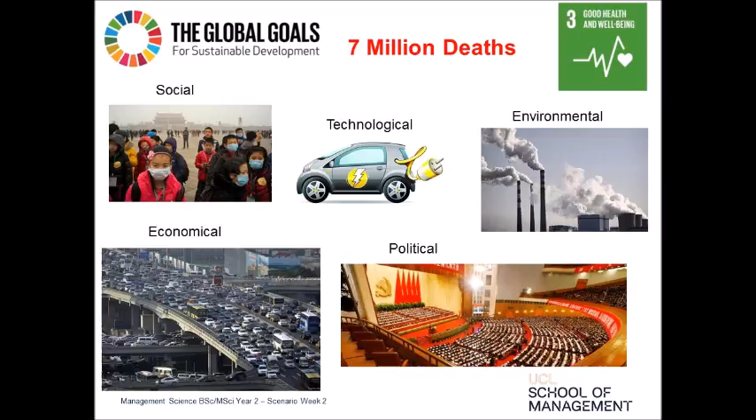Given Blueair, a Swedish air purifier filter company, as a starting point for this task, we have identified the main weaknesses of the well-known HEPA high-quality filter.

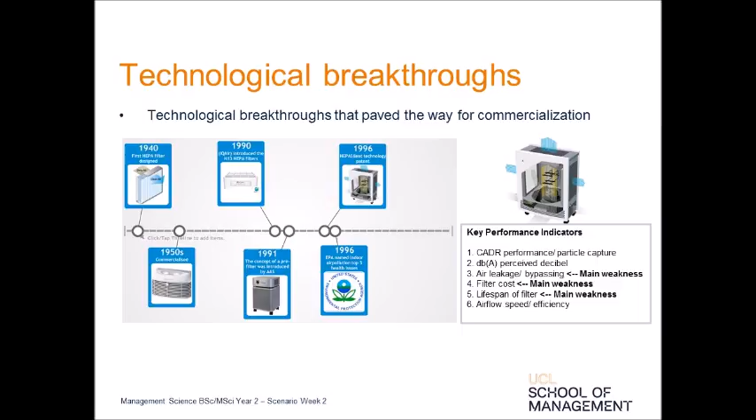Secondly, another main weakness is that HEPA filter can only remove 99.97% of particles in the air down to 0.3 microns in size. But knowing that 90% of particles are smaller than this, called ultrafine particles, these filters themselves do not actually solve the problem, as it is marketed by profit-driven companies.

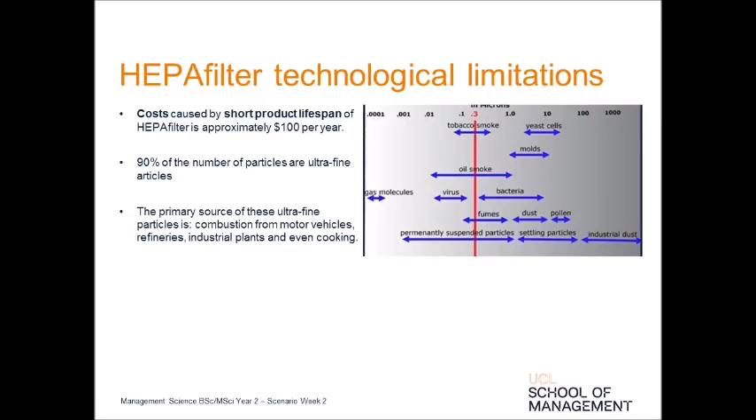In terms of potential new application for the technological improvements, it obviously boils down to the economic viability of such an application. We first sought to implement HEPA filters in cars' already existing air conditioning systems, but we then asked ourselves, who will want to pay for this?

We realized quite quickly that the barrier, the high cost of adding this filter to a car in the manufacturing process, was way too high. So after doing a quick cost-benefit analysis, we decided to narrow down to public transportation only, and more explicitly subway trains located in Beijing, China, assuming that governments are more willing to take on this cost. Why is this true?

Firstly, generally speaking, governments should have more capital to play around with in the transportation budget to create value for the common good compared to profit-driven car manufacturers.

Secondly, also from the incentive of healthcare cost savings in the long term caused by indoor air pollution, governments become a more realistic source of capital for implementing HEPA filters in subway existing ventilation systems. By this, we know that we have targeted the right application for this technology.

As we choose to focus on the air quality of public transportation in China, we further decided to choose the rail transit systems in Beijing as a starting point for our scenario. The reason we chose the subway system is mainly because of the proved bad air quality inside the subway.

A non-government organization did research about air quality inside the Beijing subway system and reported that PM 2.5 value reached 72 in the carriage and 129 on the subway platform, while the outside index is only 8. This means air quality could be up to 16 times worse in the subway system than outside.

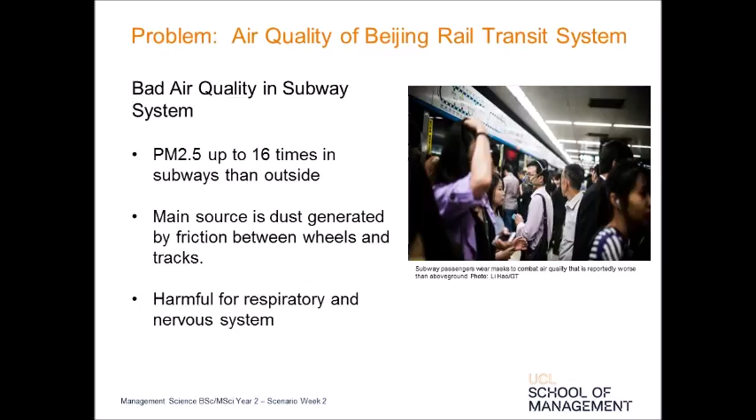Moreover, choosing Beijing as a starting point is because of its scale and influence. Firstly, we ran a quick search showing that China and Beijing ranked top 1 and 2 in terms of social sharing about the air pollution problem.

Secondly, Beijing subway has the highest ridership in the world, with 3.41 billion trips delivered in 2014. And it is estimated that the size, in terms of length, of the whole system is going to be doubled by 2020 compared with 2014.

Also, in terms of commuting time, BBC found the average time that a commuter would spend in transportation in Beijing reached 52 minutes, which is the longest in China, and even worse than in New York. That means a massive number of riders in Beijing are spending a considerably large amount of time in the subway.

Furthermore, several cases have been reported of frequent subway riders in Beijing having lung and brain problems, potentially because of the bad air quality inside the Beijing subway system. Therefore, improving the air quality in the Beijing subway can potentially reduce the exposure and illness for a large number of riders.

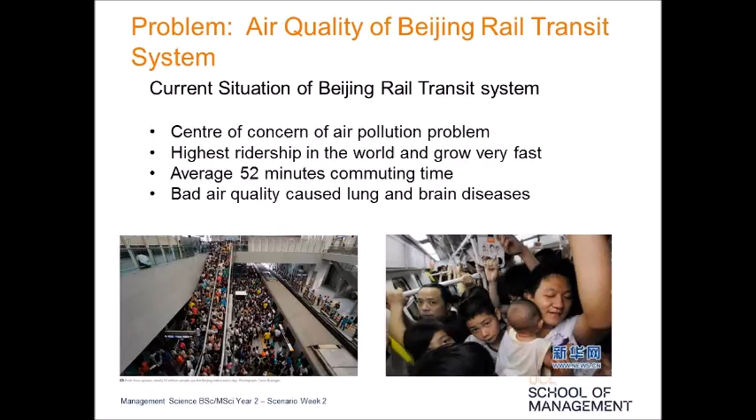We want to deal with this problem more efficiently by applying new technology that has been developed, installing high-quality air purifier filters inside all 3,400 subway carriages in Beijing.

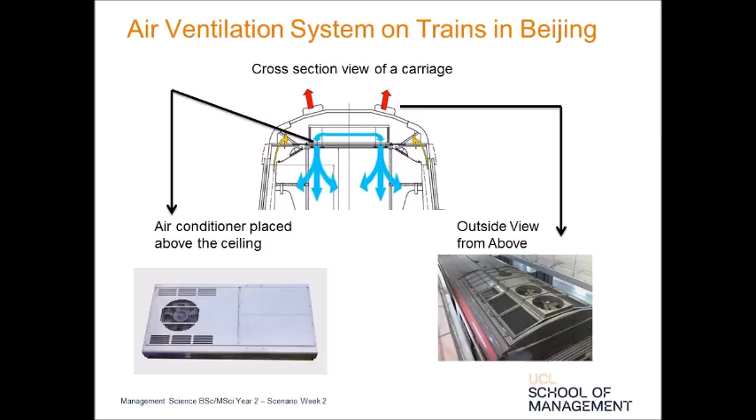We now look closely at how we can reduce air pollution inside the trains. In this cross-section view of the carriage, the yellow arrow shows dirty air being pushed into the roof compartment, the red arrow shows some air released outside, and the blue arrow shows conditioned air which went through the air conditioners placed just above the ceiling.

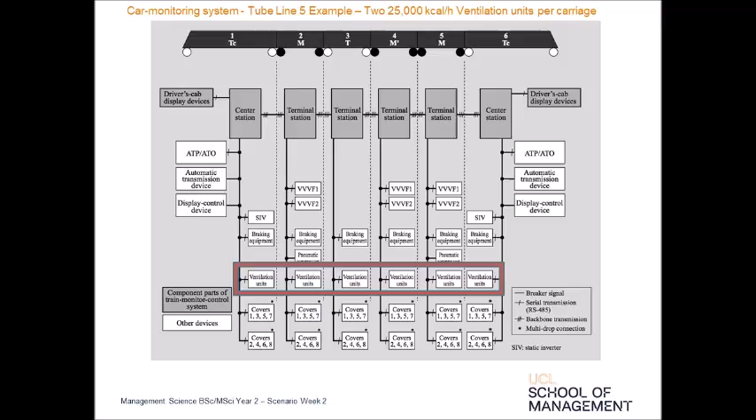This figure shows the configuration of the car monitoring system for a typical train such as Tube Line 5, which runs through Beijing. The system shows a range of electronic devices on the train in each carriage, and shows if the ventilation units are working or not. There are 2 ventilation units per carriage.

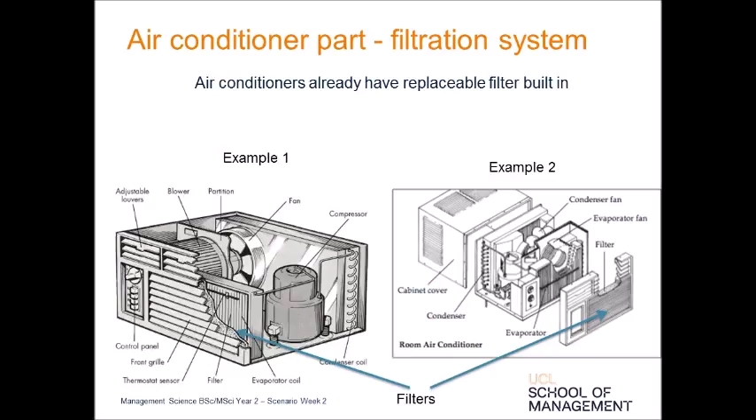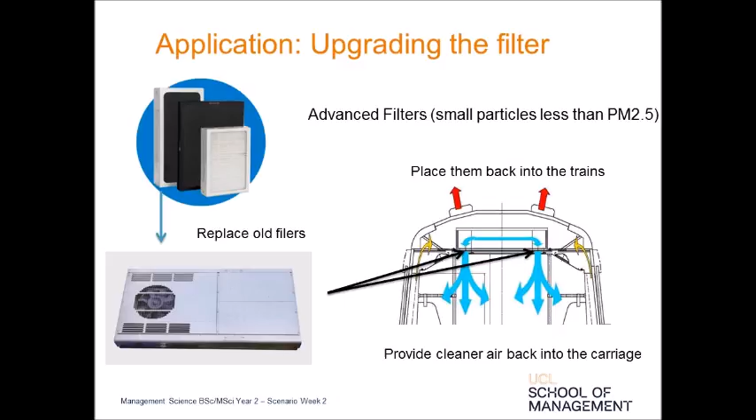We can do more with air filtration technology by replacing the existing low-quality air filters with advanced air purification filters specifically designed to purify air and reduce the level of small particles, size PM2.5 or smaller. As Anna said earlier, HEPA filters are actually not as brilliant as they sound at first glance, and they are not successful at removing ultrafine particles.

The next stage up is the ULPA filters, which are able to remove 99.999% of particles down to 0.1 microns in size. But it is this last segment of particles, 0.1 microns and smaller, that actually makes up 90% of all particles in the air, which we want to be more successful at removing.

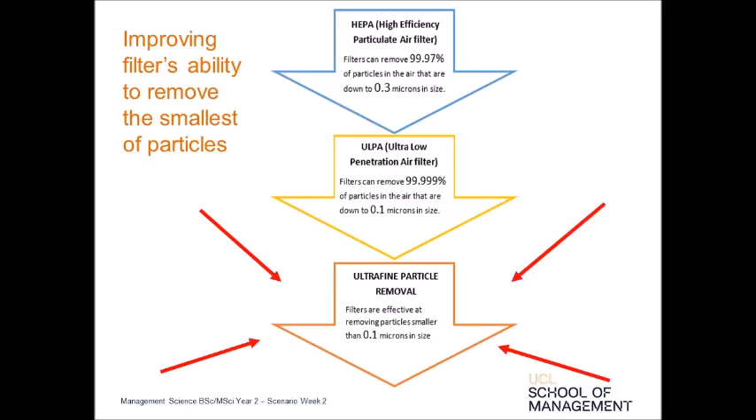Having done some analysis, we came down to 3 technologies that work to remove ultrafine particles below this boundary of 0.1 microns in size: UV, ionic, and activated carbon. We chose to look at activated carbon in particular, as UV produces ozone which is harmful to human health, and ionic filtering systems are not as efficient at retaining the particles they filter.

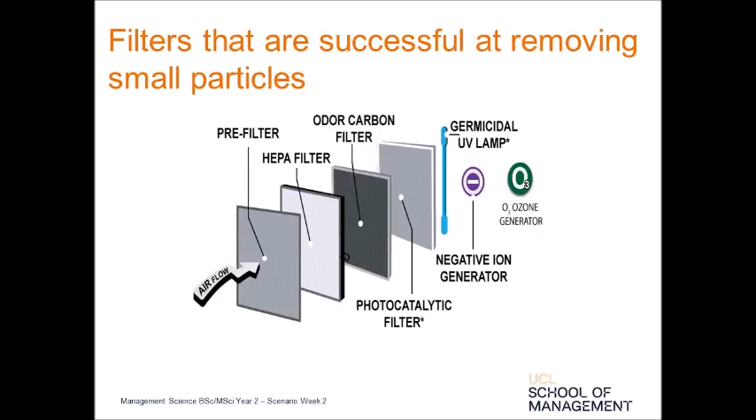To give you an idea of how activated carbon works as an air filtering technique, carbon is treated with oxygen, which produces a highly porous material providing a large surface area. It is this which gives activated carbon its unique absorption properties.

The process creates a very large internal surface area. The more surface area, the more the carbon can absorb. The activated carbon pores can be as small as 0.02 microns in diameter, and this allows it to remove the tiniest of particles, including volatile organic compounds.

Sometimes the carbon is treated with oxygen and another chemical, often potassium. This creates a chemisorbent, which is better at removing inorganic gases and gases that are highly chemically reactive.

Activated carbon works by adsorption. In this process, the gas bonds to the surface of the activated carbon, letting the clean air flow out of the other side of the filter. Due to the large internal surface area of activated carbon, it can actually absorb up to 60% of its weight.

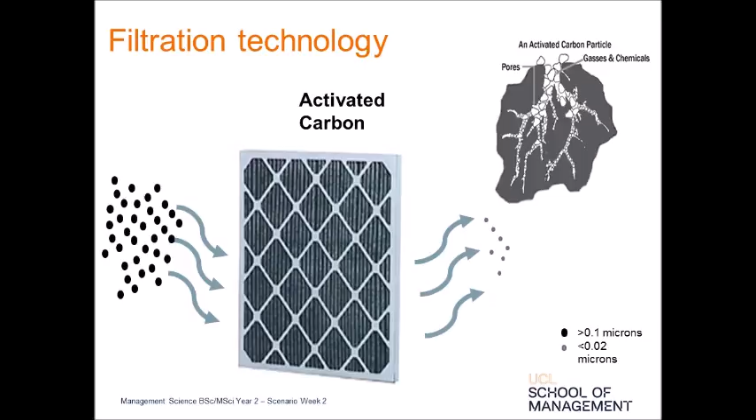Good carbon filters of 10 pounds or more, depending on the environment in which they are used, can last anywhere from up to 5 years before all the pores are full, and then it would just be a case of removing the activated carbon layer and slotting in a new one.

We recommend using 2 layers of activated carbon at different stages in the air purifying unit. For example, here we have 1 layer between the pre-filter and the HEPA filter, and 1 at the end. This is a sort of double check, if you like, that as many ultrafine particles as possible have been adsorbed and won't be released back into the air.

So what's so great about activated carbon as an air purifying material? Well, it can absorb 60% of its weight in airborne pollutants. The more activated carbon in the filter, the more pollutants it can remove and the longer the filter lasts. It's cheap and also light.

A study done by ResearchGate found that there are on average 2.49 times 10 to the 10 ultrafine particles per cubic metre of air in Beijing. We combine this with the volume of Beijing subway carriages, which is 101.4 metres cubed, and with some simple calculations...

...we were able to conclude that in the best case scenario, if the activated carbon only absorbed the ultrafine particles in the air - not a far off assumption, as it is less effective at collecting the larger particles, where the HEPA filter stage works best - then just 1 pound of activated carbon in a filter could adsorb close to 6 million times the volume of ultrafine particles in one Beijing subway carriage.

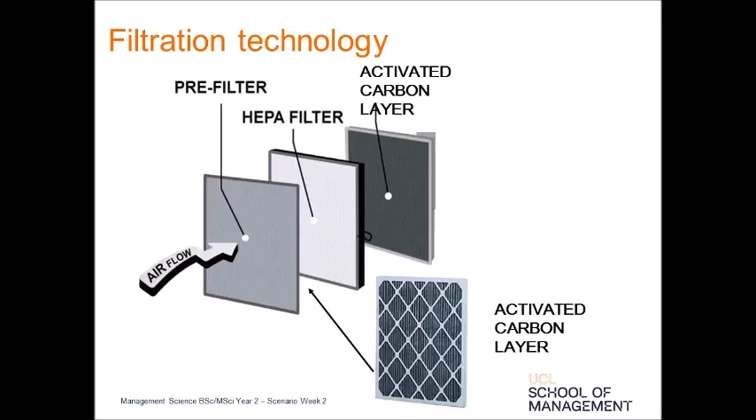Considering also that the average number of riders daily in Beijing as of 2014 was 9.28 million, these filters have the ability to have a positive and significant impact on the health of these commuters every day.

After doing a detailed patent analysis on QUID, we found a recent patent filing from China which presents a specific activated carbon filter material useful for air conditioner filters and air purification devices. So we believe the technology is just emerging, but already it's been considered for use directly related to our application of air conditioners.

Knowing how high the cost of replacement is, in order to successfully realize the integration of filters in the Beijing subways, we need to maximize the cost effectiveness when replacing the filters in the air conditioning systems. From previous analysis, we know that the lifespan of HEPA filters is determined by its design and materials.

The common material used is glass fiber, which is too fragile for this potential application, hence making up a critical technological constraint. So which material layout should we then use?

By looking at the study done in Seoul, Korea, that measured the environmental benefits against the cost of filter renovation in subway ventilation systems, we could draw some important conclusions. We can clearly see that the combined filters material layout is significantly having a greater positive environmental effect. The table clearly demonstrates the social benefit of combined filters in contrast to choosing only a pre-filter layout. This extra layer will collect 4.01 kilograms more PM2.5 in trains per year and also minimize the environmental cost by $1,322 per year.

But is this combined filter setup an economically viable investment? Let's run some numbers. This study replaced the pre-filter twice a month and cost $252 each time, so that the annual cost becomes $6,048.

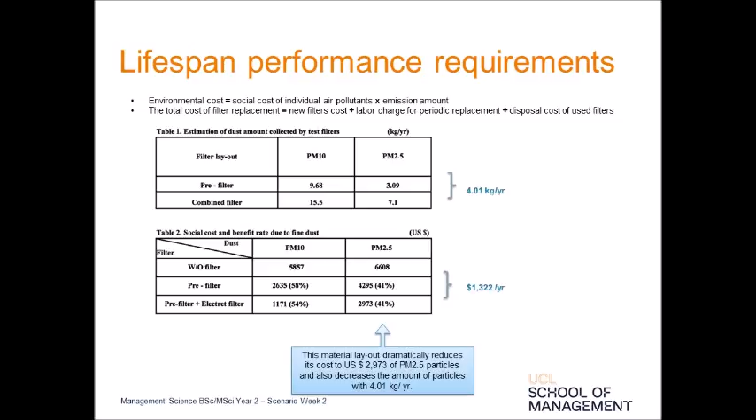The actual expense for combined filter layout is $6,000 for the first test installation plus the replacement cost every 3 months of $450. In the long run, the new combined filtration layout costs approximately $8,756 per year, including filter disposal, labor charge, and the equipment depreciation cost for 20 years.

So, to answer the question of cost effectiveness by extending product lifespan of filter, which is basically a material choice, if we consider the metrics of overall effect achieved from the investment of each material, we can see that the conventional pre-filter layout is the same as the combined filter layout, more exactly 41%.

How is this then possible when combined layout lowers the social cost significantly? Simply because the cost of combined materials is higher compared to the pre-filter per year only, so it makes the effectiveness of the investment a bit handicapped.

But this said, if we increase the current investment efficiency of 41% to go beyond the pre-filter only return on investment, then we create value both in economical and environmental incentive for the Chinese government to act and invest in this application. So to conclude, this is the performance gap that we need to achieve to make this application economically viable, making the social benefit override the cost element.

Now, with the technological targets of 1, making sure that our filters capture smaller particles, and 2, increase the cost effectiveness of filter replacements in mind, how will this application ultimately help us reach the Sustainable Development Goals after all?

Let's now imagine Lucy. She's a Beijing citizen and spends an average of 52 minutes commuting to work every day, which is approximately 60 kilometers of travel. The in-train concentration exposure in Beijing is 112.6 PM2.5, which in comparison to other cities worldwide is at an extremely harmful level. Studies show that commuting in the subway attributes substantially to the personal exposure.

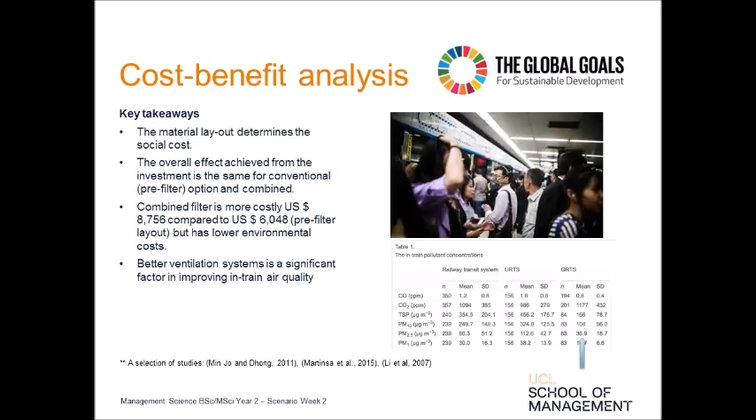In summary and advice to UK CDS, we would like them to make our application of reducing in-train air pollution possible by 1, funding projects to improve air filtration technology to capture smaller, more harmful particles, 2, funding projects to increase the cost effectiveness of air purifier filters, with the ultimate aim of achieving the SDGs.

As our technological application is designed to ultimately convert standard air conditioners to particulate matter filtration devices, the application scenario could be endless. Depending on the result of the test implementation on Beijing trains, the next scenario would be the train station, buses, schools, offices, and other locations where there is an existing air conditioner actively in use. Therefore, the benefits from this technological improvement in reducing the number of deaths from particulate air pollution could be far greater than our initial estimate.